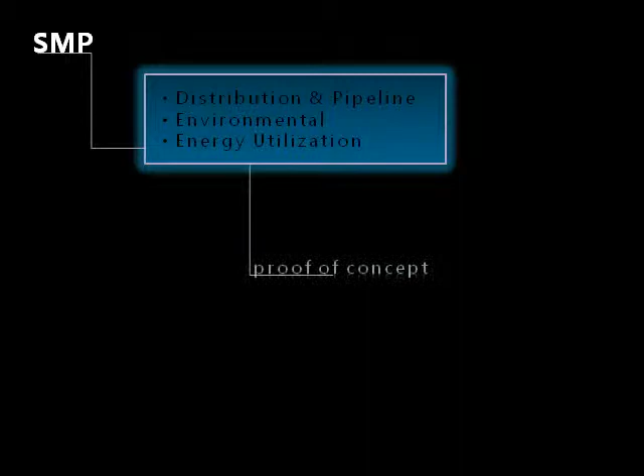SMP performs research within 3 areas and develops technology through proof of concept. This is when the most promising technologies are continued through short to mid-term R&D programs. This collaborative approach brings together funding resources and the expertise of SMP members and GTI researchers, tapping into their collective wisdom.

SMP sees increased interest in new natural gas markets and a growing need for supplies. Much focus is concentrated on environmental issues, and a multitude of R&D takes off in this area throughout the 80s and 90s.

The Solcon digester tested at Walt Disney World was one of these projects, an effective community waste treatment that performs more efficiently with feed materials having a high solids content.

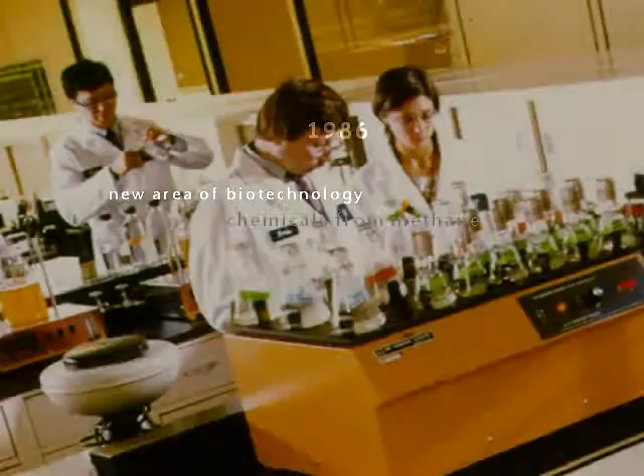A new area of biotechnology finds program support, converting methane feedstocks into useful high-value chemicals.

In 1988, global warming also takes shape as a policy issue. Threats to the nation's environment and to the health of millions leave SMP faced with developing environmentally friendly solutions.

The methane enrichment digester for producing utility-grade gas from a pilot-scale anaerobic digester demonstrates successful results for renewable energy production.

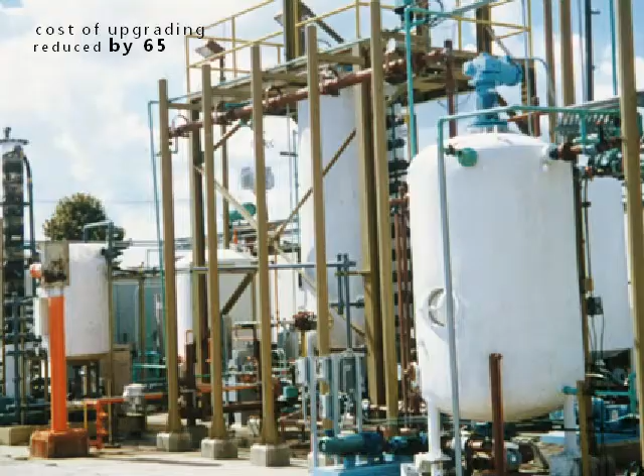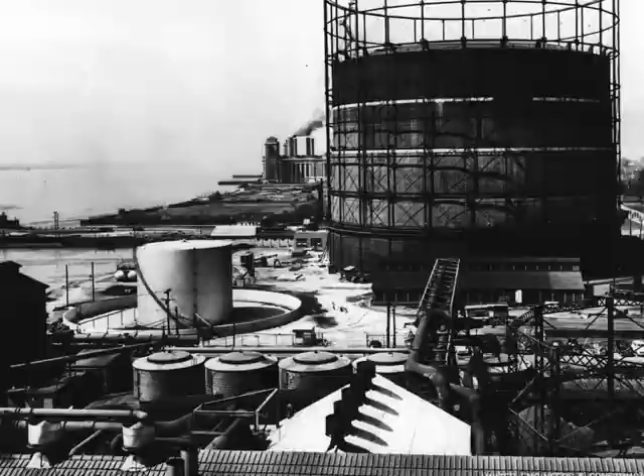Manufactured gas plants, which converted coal to town gas, operated on the outskirts of towns and cities until the mid-1900s. Today these plants represent a significant environmental liability to the utility industry.

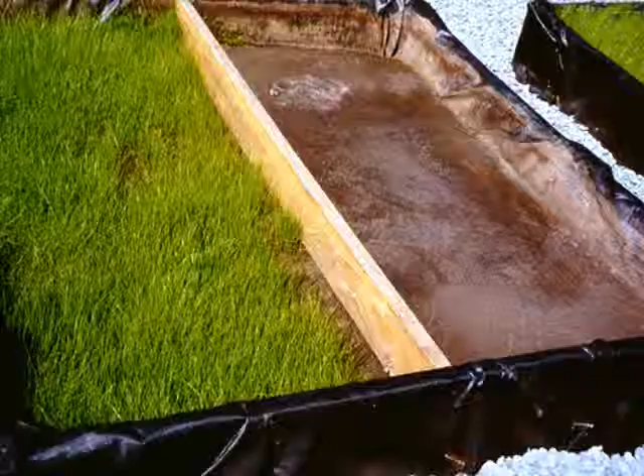SMP funds a suite of technologies brought forward for industry in subsequent years, reducing costs of management of legacy sites by more than 50%.

The impact of MIC pushes SMP development of field kits and new approaches for mitigation. Documented reports and field guidance manuals are currently available from GTI.

SMP completes its 5th year, welcoming their first international participants.

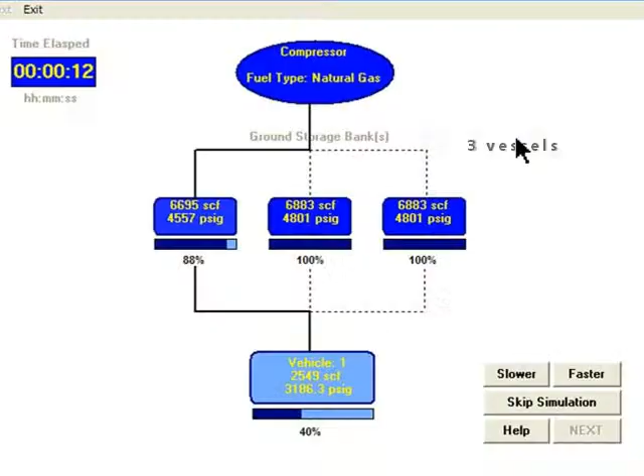Cascade software developed by SMP is used by nearly 175 companies to assist in the design of natural gas and hydrogen fueling stations, providing capital and operating cost savings.

After air quality issues in '89, glass companies are under pressure to find cost-effective ways to reduce NOx emitted from their furnaces. SMP introduces an advanced method of oxidant staging in high-temperature industrial furnaces to address the NOx control issue.

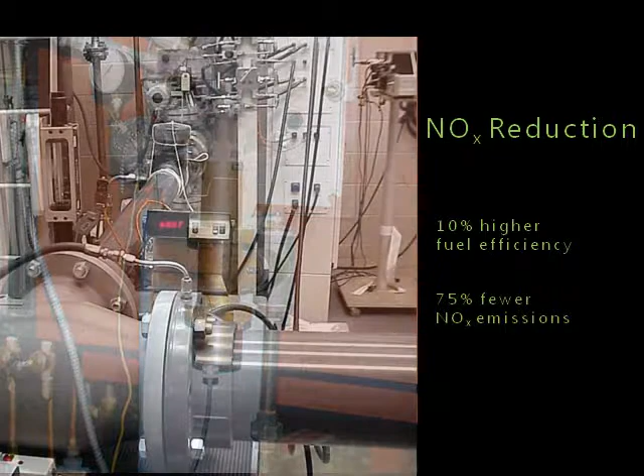SMP finds a way to reduce burner replacement needs. By installing a valve, oscillating combustion boosts industrial furnace productivity while reducing fuel consumption and NOx emissions.

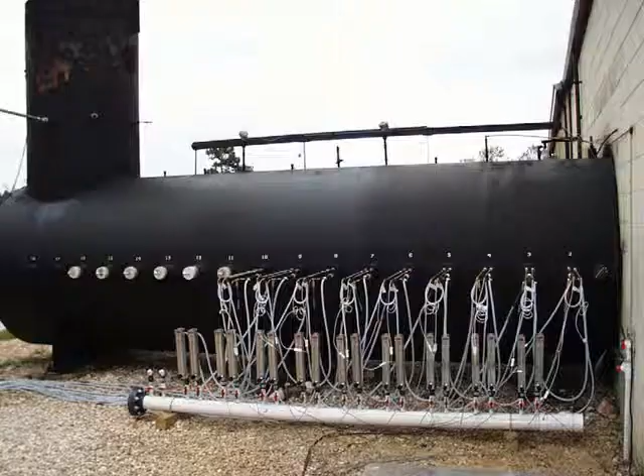An oxygen natural gas system called the high luminosity burner is initiated for glass melting. This top-of-the-line burner, licensed to Eclipse as PrimeFire 400, increases heat transfer rate and reduces NOx emissions by 50%. 100 systems are sold around the world.

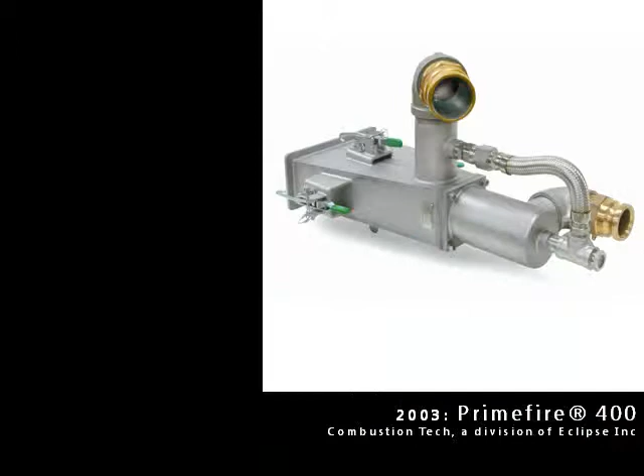Methane denox is an economical NOx reduction technology for solid fuel-fired stoker boilers. Today the technology is commercialized by ESA in Tacoma.

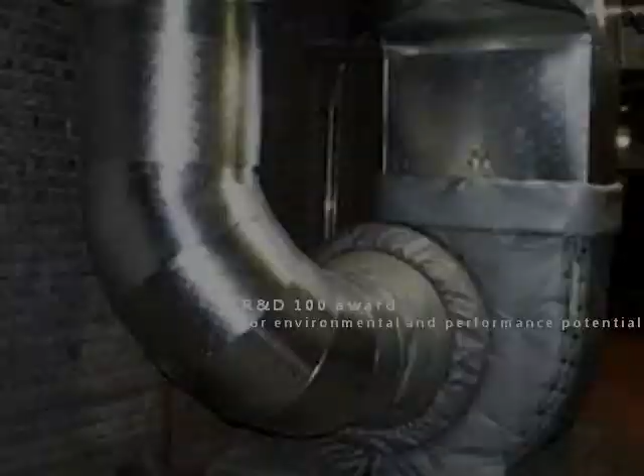SMP initiates a program aimed at development and distribution of software-based engineering tools to optimize application of natural gas in commercial buildings. One of these is DesiCalc, a tool used to evaluate and measure the impact of desiccant applications.

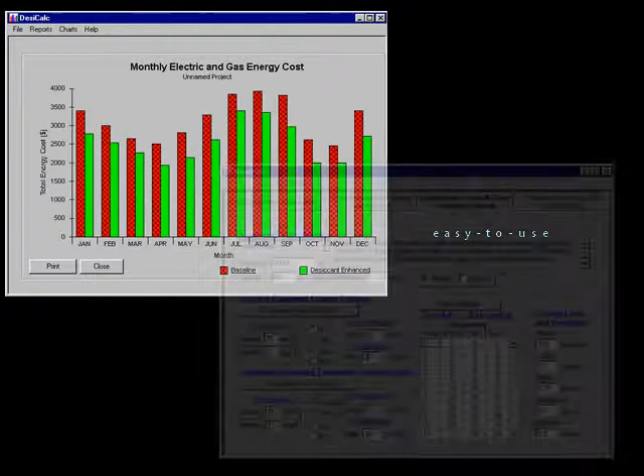This advancement later became a significant platform for developing the Building Energy Analyzer software, pulling in over 300 active users.

SMP becomes involved with keyhole technology, and many tools aimed at minimizing excavations come out of the program. Cured in-place lining, commercialized in '99, is a trenchless system for rehabilitating aging steel and cast iron natural gas pipes.

A boom in low-emission industrial burner research results in FIR technology, boosting efficiency and cutting NOx emissions. Development leads to a new generation of burners, most notably the superboiler.

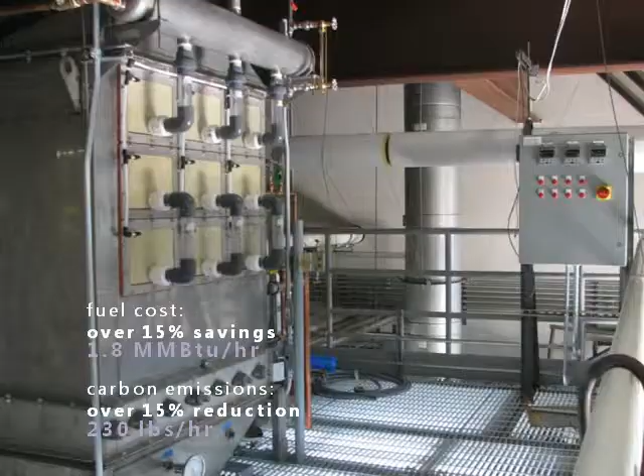The superboiler project is awarded by DOE in 2000. The design combines an ultra-low NOx burner with a novel heat and water recovery device, known as the Advanced Heat Recovery System, that features the Transport Membrane Condenser, TMC. This will be commercialized by Cannon Boiler Works in 2010.

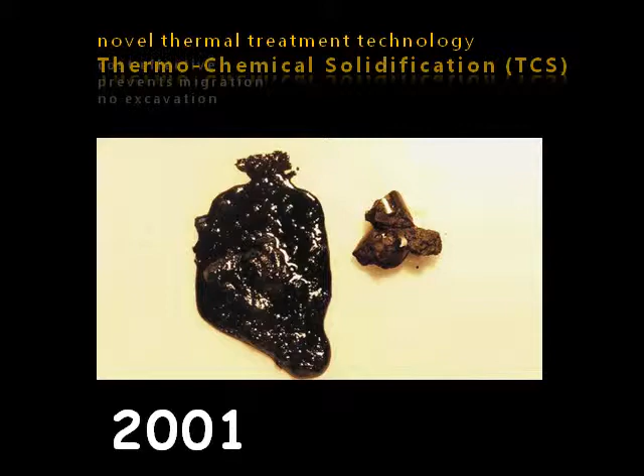Remediation efforts support the development of thermo-chemical solidification for soil and residue management. The treatment, licensed by TerraTherm, leaves behind a stable, asphalt-like material where contaminants are permanently solidified in place.

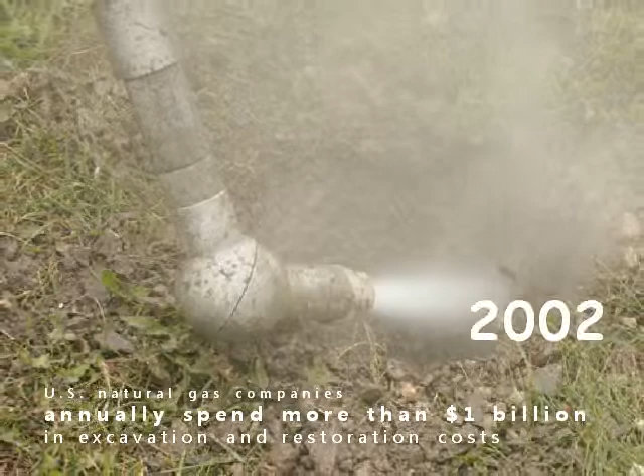Companies are spending large amounts on standard excavation techniques. The micro-excavation tool supports keyhole technology by accessing buried utility facilities through openings as small as 4 to 6 inches in diameter.

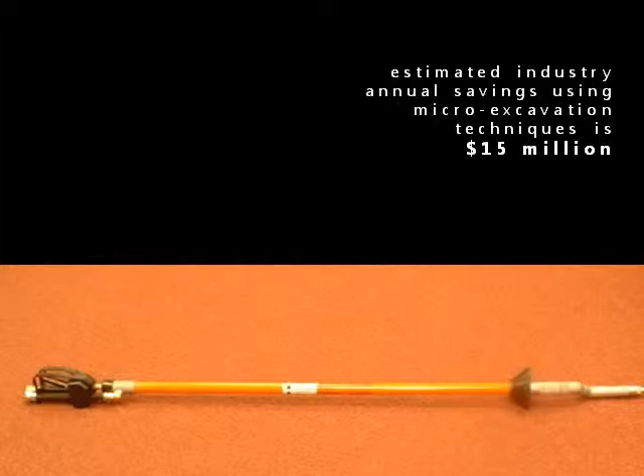With the loss of FERC money, a new R&D model emerges. OTD is formed to ensure ongoing technology development in the distribution area. UTD is launched to address the end-use issues of interest to the gas industry. These programs pick up at the proof of concept stage where SMP leaves off.

The next generation melting system addresses the need for a lower cost glass melter, leading to submerged combustion melting. This lowers capital cost and provides energy savings, emissions reductions, and operational flexibility on a wide range of materials.

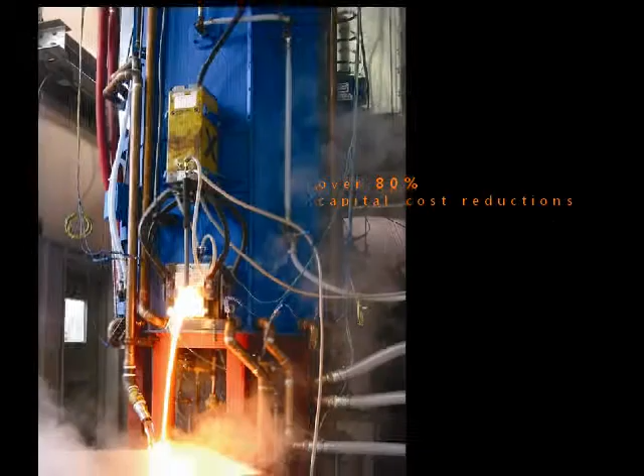The flame spray coating system helps control steel pipe corrosion, reducing life cycle costs for pipelines by minimizing costly excavations and repairs.

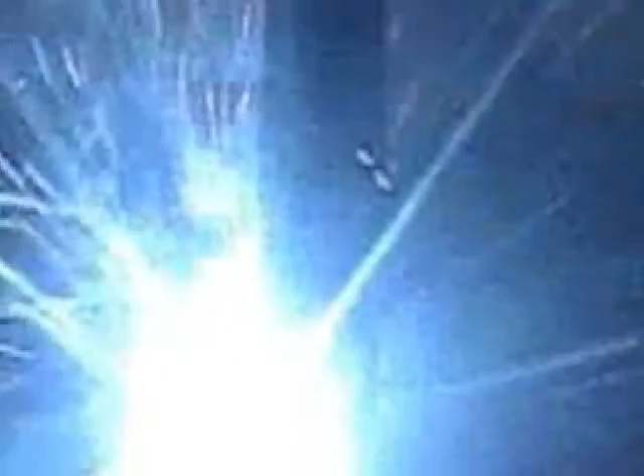New automated welding technology through small diameter keyhole excavations combines the benefits of lower excavation and restoration costs with a high quality weld. Each year, about 65% of all plastic pipe damage is caused by third-party impact.

The unique multi-layered PE pipe material detects activities near a pipeline and transmits information electronically to alert an operator.

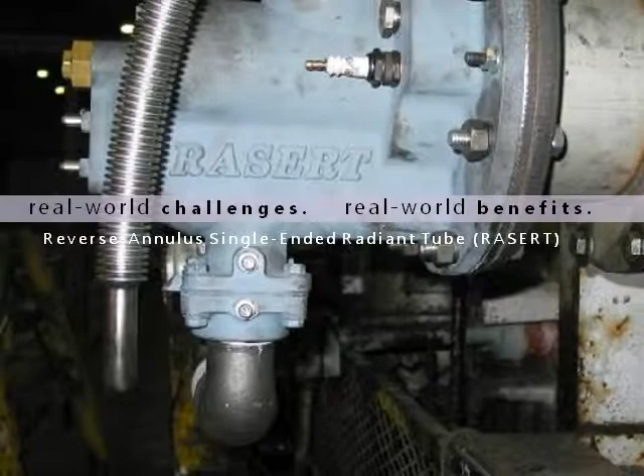The RASERT burner, licensed to Fives North American Combustion, increases thermal efficiency, reduces NOx emissions, and provides the potential for boosting productivity rates for industrial applications.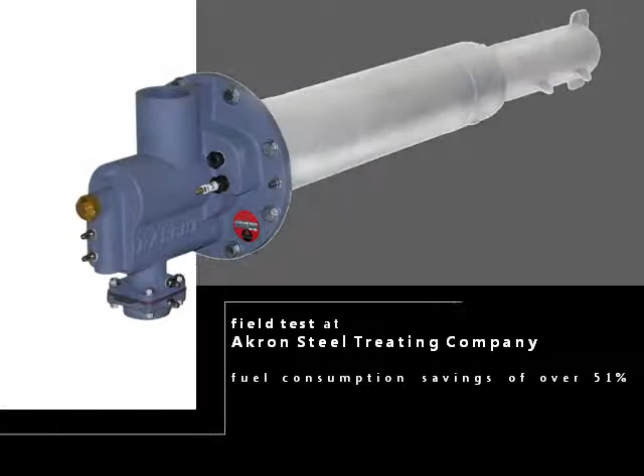The economic recession becomes particularly apparent across the nation, even reaching the natural gas industry. Technology development and lower operating costs are more important than ever.

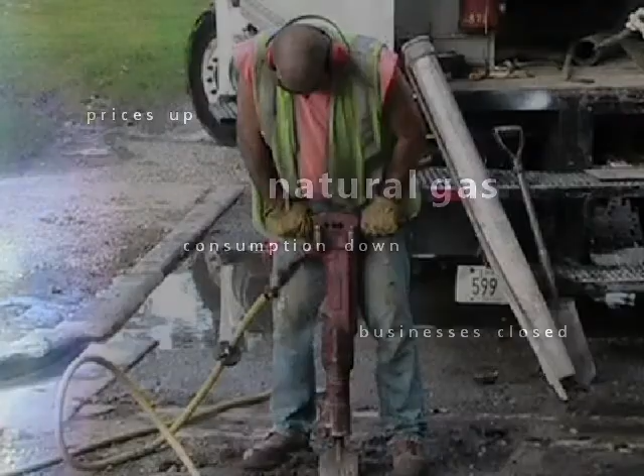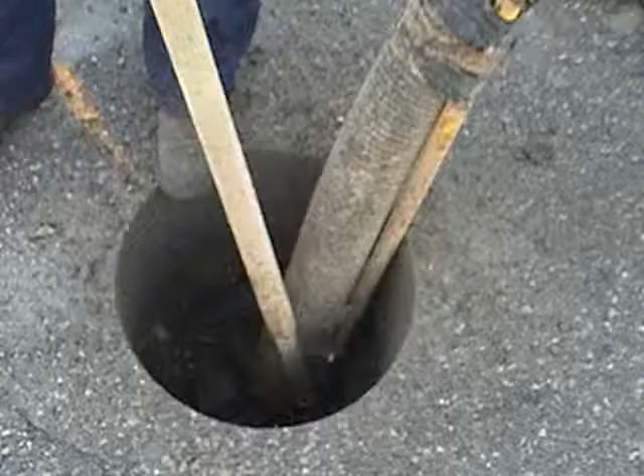GTI receives a patent for metallic joint locator, which can locate joints in steel and cast iron gas piping from above ground at depths of more than 4 feet. With roughly 400 joints per mile of cast iron main, companies with even modest amounts of cast iron can benefit from the MJL.

The high-efficiency drum dryer is tested in California, a growing user of natural gas, for industrial food processing, achieving increased production, higher temperature capability, increased energy efficiency, and lower carbon emissions.

SMP sponsors a workshop pulling industry together to explore the value of gas integration with a smart energy grid.

Today, our energy needs continue to grow along with our population. GTI is well positioned with labs, capabilities, and expertise to meet the key energy challenges of today and the future.